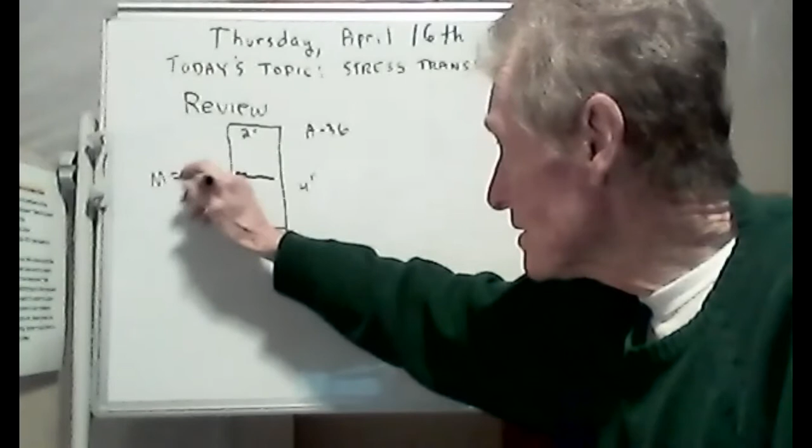And let's suppose you had a bending moment. Now, I like to draw my bending moments with double arrows. Say the bending moment was 10 kip feet. And also, let's say we had some shear acting on it. Suppose there was a shear force, maybe, I don't know, how about 40 kips?

Now it's a beam. You understand now, this thing's going back in space here, and you're looking at the cross section of a 2x4 inch beam, only it's steel.

Now, we're having a little review here while people log on. Oh, I got some more customers. Look, Caitlin, Daniel, Gavin, Eric, welcome.

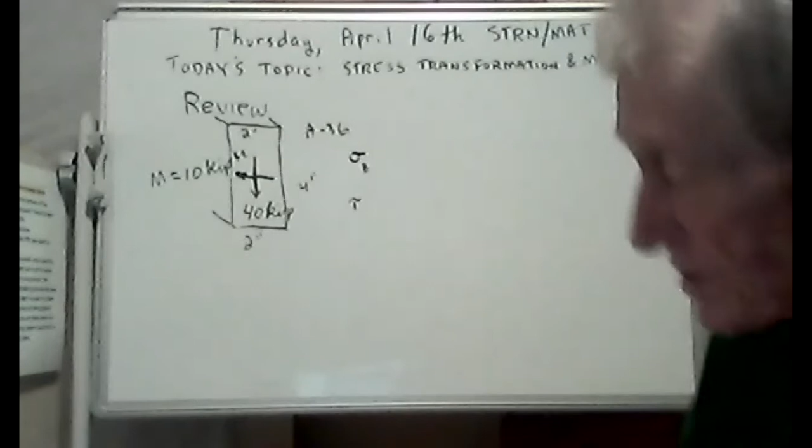Okay. Now, what I want you to do here for a review is to find the bending stress and the shear stress, but the question is where. See, you gotta tell us where, because remember at the top and at the bottom there is no shear stress.

The maximum shear stress on a beam that's bending is in the middle. The maximum shear stress is in the middle. Maximum shear stress. Remember that.

I don't know if I took you on that little field trip to the atrium there around the corner from our classroom. There's a beam that's split in the middle because of the shear stress. I don't remember whether I did that with you or not.

And now the normal stress, it's just the opposite. It's maximum at the top and bottom, and it's 0 in the middle. Here, I'll write that for you visually oriented people. It's 0 in the middle. We probably should say, what's the word instead of middle?

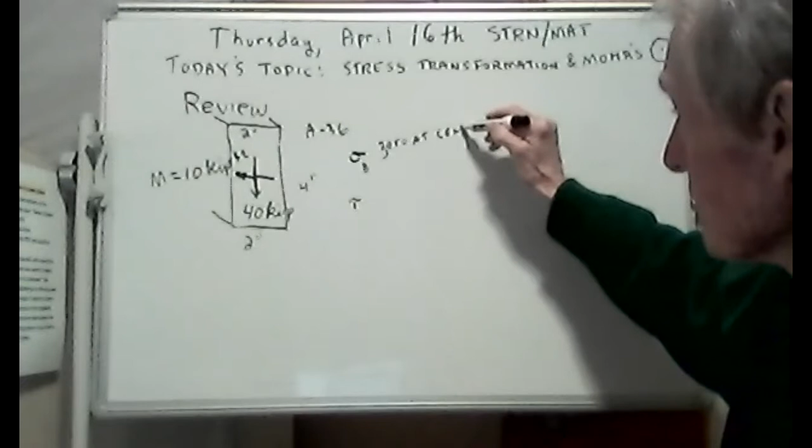Centroid. Yeah, because not everything's a rectangle. It's 0 at the centroid. And it's maximum at the top and the bottom. Well, it'll be maximum at the maximum distance from the centroid. Top and bottom are the same distance from the centroid.

Now the shear stress is 0 at the top and bottom. Hopefully I'm boring you and you know all this. It's 0 at the top and the bottom.

But see, it's maximum at the centroid. The normal stress is maximum at the top and the bottom. I just spelled bottom wrong. That's not right. There you go. And the shear stress is maximum at the centroid. They're just kind of opposite.

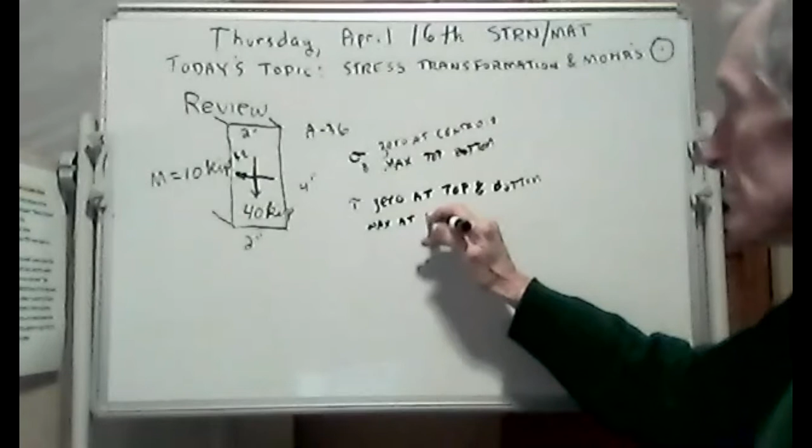And y'all, little Southern talk, y'all understand that. I'm just repeating stuff that you already knew. Can you read my writing there? It's awful small. Well, I hope you can read it.

If not, speak up. Let's see, we got Eric, Daniel, Dalton, Caitlin, Cameron, Allison, and Kristen's back with us. Hey, Kristen, have you had your coffee this morning? I'm working on it, sir.

Okay, now you have to decide where you want to talk about. Well, I'm going to pick us a spot and we're going to do it. We're doing a little review here for a minute, and then we'll get into our main topic, which is stress transformation. But let's pick this spot right here.

Now, if this is 4 inches, that distance from there to there is 1 inch. You're 1 inch from the centroid, and you're also 1 inch from the top. And we want to find the normal stress at that location. We could give it a name. How about calling it point P? We're going to find the normal stress at point P.

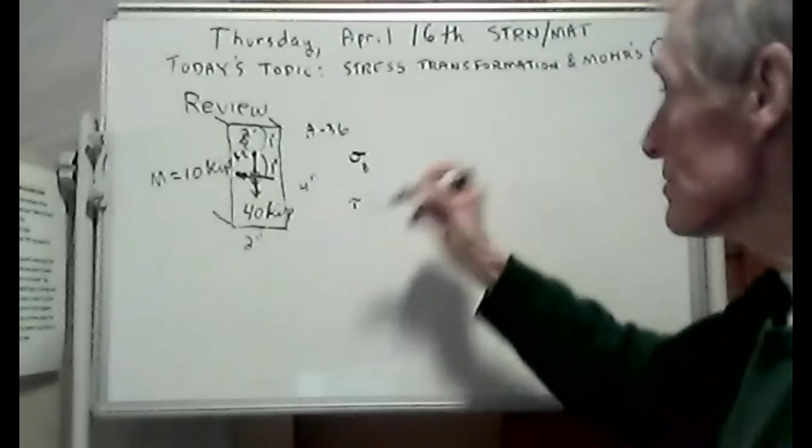Okay. Well, you know the equations. Here, let me write the equations. You know this one here, it goes minus My over I. And this one goes VQ over IT.

Now these equations have names, and you know these equations by heart. You know that this one here is called the... starts with F. Flexure formula. Yay, it's the flexure formula. And this one here is called the shear formula.

All right. Well, notice I is in both of them, so we're going to have to get I. Well, that's not a problem. That's just 1/12 times 2 inches, times 4 inches cubed. Man, that's it. Okay, I could almost do that in my head, but no, that's too hard. I can't do that in my head.

Okay, I got an answer. I'm getting 10 point, a bunch of sixes, inches to the fourth. Hey, looky here, we just figured that out. And the bending moment is given.

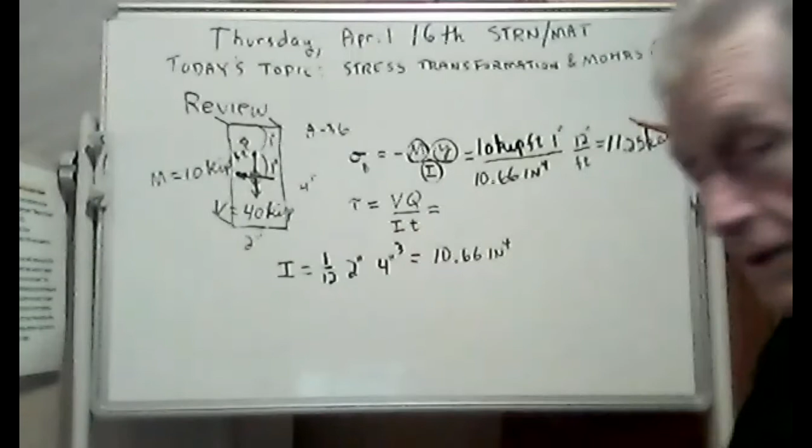Okay, now we're going to do this one. Now we know V, this is V right here. See, V is 40 kips. Q, oh, here's that Q thing that gives students trouble. It's called the first moment of area.

I we've got. V we've got, V is 40 kips. I is sitting right here. Now T is 2 inches. So I know that, oh, it's that stinking Q that could give you problems.

Again, I think I'll shut up for a minute and a half and I want to see if you can do that. We're trying to find the shear stress at this location P. I called it P, it's right here. It's kind of 1 inch from here, that's where it's at. We want to find the shear stress. See if you can do it. On your mark, get set, go.

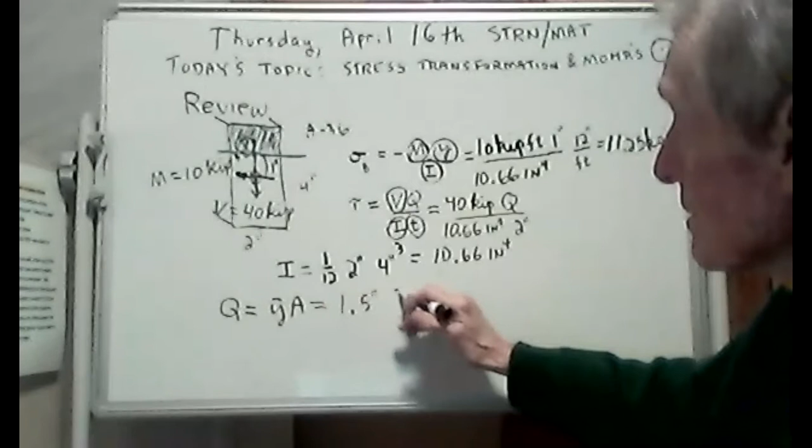There you go. Now, the way I tried to tell you to find this Q thing is you draw a line through the place where you want to find the shear stress, and then you color everything above the line. There, I colored everything above the line. And for rectangles like this, Q is just going to be Y bar times A. It's just going to be the distance to the centroid of your colored area, which in this case is 1.5 inches. And the area is a 2 inches by 1 inch area. And I'm getting 3 inches cubed for my value of Q.

Now we know what Q is, it's 3 inches cubed, and you can solve it. And I'm going to do that now, and I'm going to get the shear stress at that location.

Well, I got an answer, and what I got was 5.63 KSI.

And I'm going to wait till I hear some uh-huhs. Uh-huh, there's one. Yes, Professor. There's 2 of them, I need one more.

Hey, what about my friend Kristen? Kristen, did you get your coffee, and can you give me an uh-huh? Yes, sir, on both. Yay, great.

Okay, that was a fun little review thing. What I'm going to draw now is called a stress element. I've told you about these before, but we're going to draw one. I need a little room here. We'll say goodbye to all this stuff. That was fun, wasn't it? I need a little room right in here. Now we're going to draw a little stress element right in here.

It kind of looks like a little sugar cube. Here, I'll zoom in on it. See, this is just an enlargement of this little, what they call a stress element. You'll see them all over your book. I know you guys have been reading your book. It's called, that's not how you spell stress. It's called a stress element.

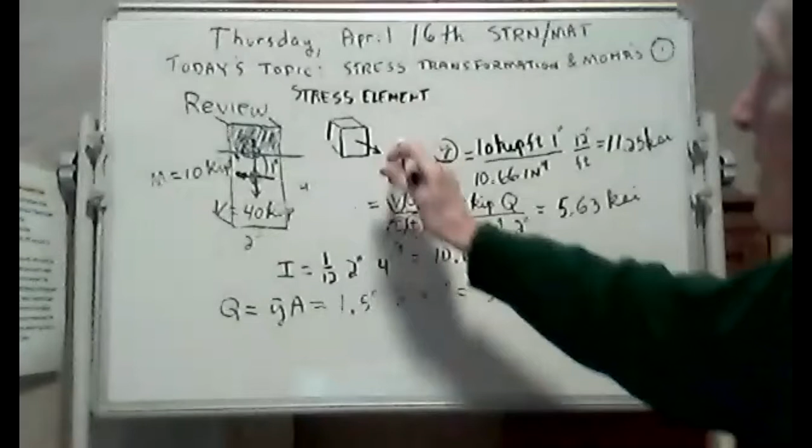And I tell you what we've discovered. We've discovered there's a normal stress. It's a tensile normal stress, because this thing is on the upper half of your beam. Remember at the top, no, I'm wrong, it's compressive normal stress. And this answer here should be negative. Do you remember the equation, had I erased it, doggone it. But the equation had a minus My over I, didn't it? And see, when y is positive, the answer comes out negative. And so you have a compressive stress

on that stress element. Now the normal stress, and I'll tell you how big it is. It's 11.25 KSI. Now you also have a shear stress, and it's going down like this. That's the shear stress. And how big is it? Well, it's 5.63 KSI.

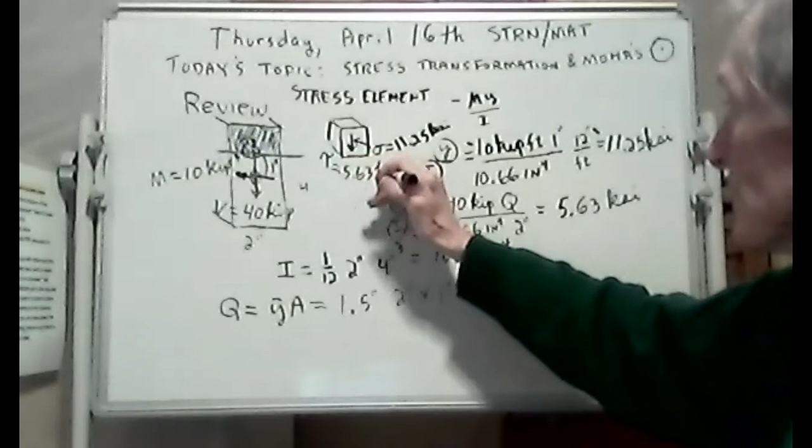That's a stress element kind of enlarged at this point P in your beam, and it's got both. It's got normal stress, which happens to be compressive, and shear stress.

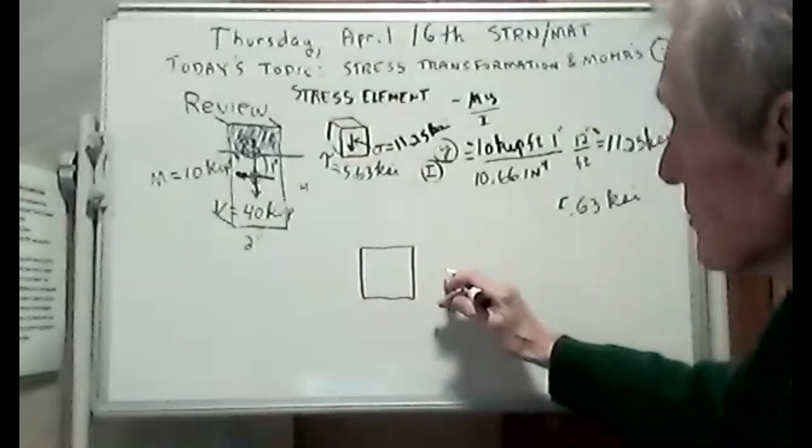Okay, great. Let me make a little room here. I want to draw this stress element like this. You see this normal stress? It's going like that. What I'm doing is kind of turning this around, and the shear stress, that's the normal stress, and the shear stress is going - I'm kind of looking at it from over here. It's kind of hard to explain, but an observer over here looking at this thing will see the shear stress going down on that side and the normal stress.

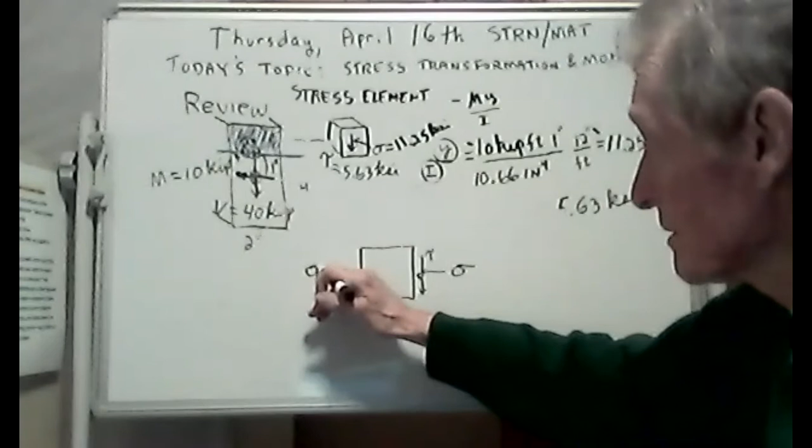Hey, look, the sum of the forces on any body in this class has got to be 0. And so there has to be a compressive normal stress acting on this back side. It's kind of hard to draw back there, but it would be going that way.

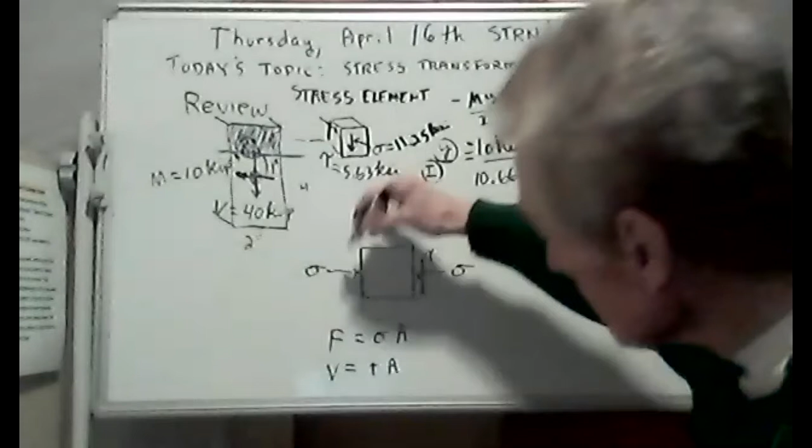Now on this shear stress, it's going down. See, force is equal to stress times area. Or if you're doing a shear force, it's shear stress times area. And guys, you can't just have one force on this thing. If you got a force going down, you got to have a force going up. So there'll be a shear stress acting on this backside. Kind of hard for me to draw. I don't know, we can do it in dashed lines, maybe going up on that backside.

But now we got a problem. Do you see how this thing would start to spin? Nothing spins in this class. So you have to have a shear stress going that way. Well, now you got another problem. You'll have a force going that way if the shear stress is going that way. So you got to have, there you go. There's your stress element. You got two compressive stresses here. Nothing's going on this way. You don't have any stress pulling or pushing that way, do you? But you do have shear stresses, 4 of them. You have to have 4 of them for equilibrium.

So we've talked about reviewing the flexure and shear formulas. We've talked about stress elements. Now I want to do another review thing. I want to go back to something we studied a while back, unless there's a comment or question.

If you have a question or comment, I'm listening. Is my microphone working okay? Yeah, it's working fine. Wonderful. Well, okay, I don't hear any questions or comments. You seem to understand that.

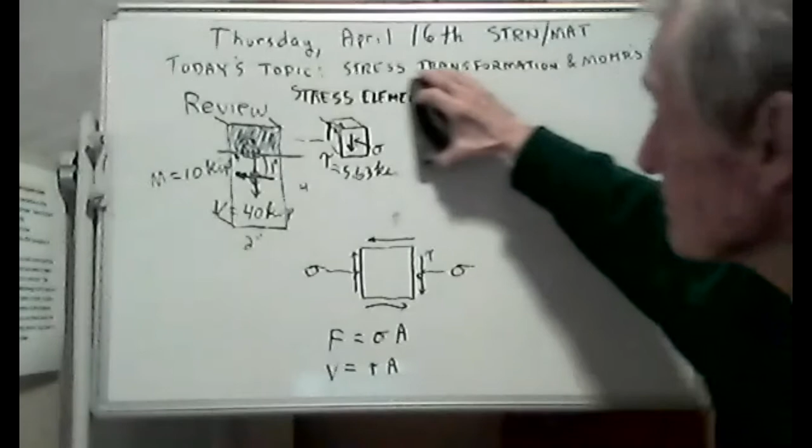I'm going to erase all this and do another minute of review, and then we'll launch into some new stuff here in a little bit. We're still doing a little tiny bit of review here.

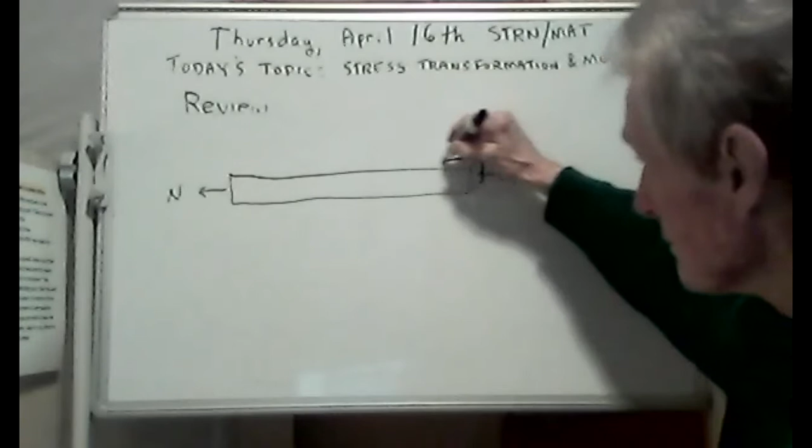Trying to draw that force there, it'd be acting in the middle. Kind of messy there. All right, and then this would be... oh gee, you get the picture. It's a little wavy there, but it's a square rod under tension.

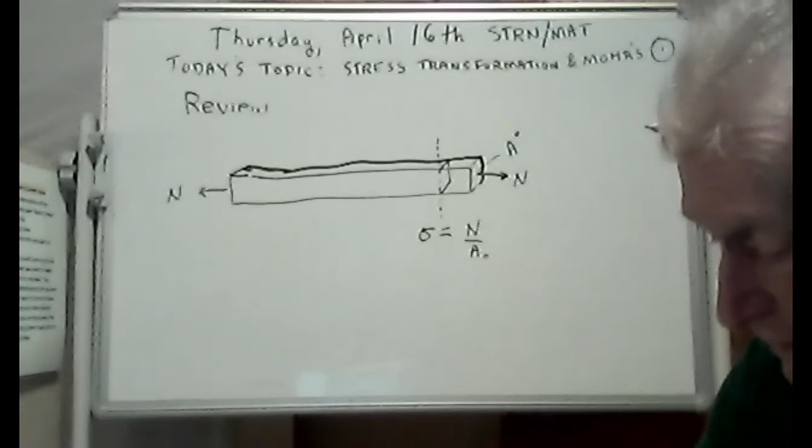We're going to call this area here A0. So if you sectioned it perpendicularly like this, and you took a section there, you would have that same tension throughout the piece, and your normal stress at any location in here, if you cut it perpendicularly, is just your force divided by your area. That's pretty boring, we know that. But back in February, or whenever it was, long ago, we talked about what happens

if you cut it at an angle. See, like if you cut this at a 60-degree angle, which would be about kind of like that. It's kind of hard for me to draw that, but I'll try. See, if you sliced it like that, you're going to discover that you're going to have a normal stress going this way, but you're also going to have a shear stress going that way.

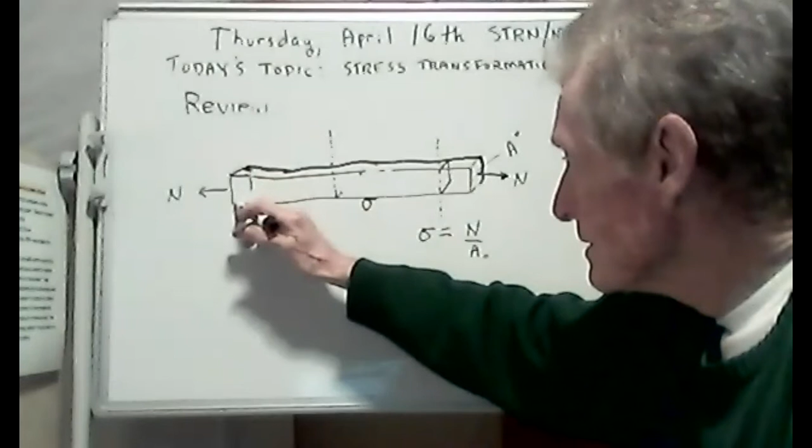I didn't draw that very good. If that's 60 degrees, let me try drawing it again. There's some hidden lines in here, we're gonna put these hidden lines in here. There we go. And so if you cut that at 60 degrees... oh gee, trying to cut it at 60 degrees, it'd be like that. All right, I'm not that swift with the artwork, but that's not too bad, I think you can almost see that.

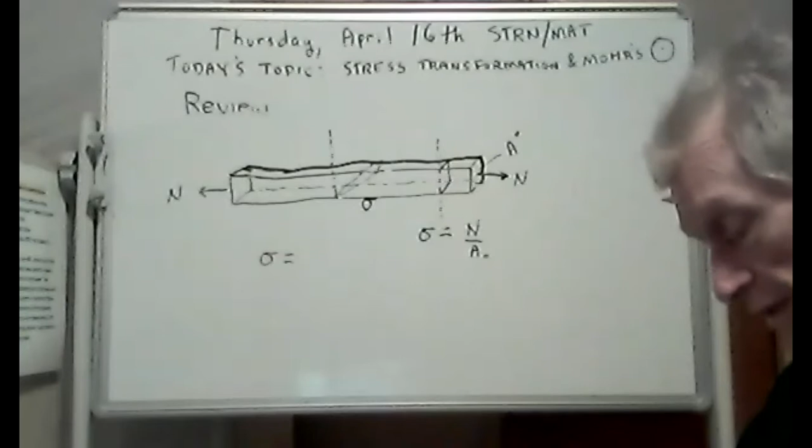If you cut that at 60 degrees, it's got a bigger area, and so you can't divide by this area here. I think we derived this, I'm not going to go back and derive it again, but we came up with these lovely equations. This one goes like this. Hopefully you have this in your notes from long ago, where this is the angle theta here, and the shear stress is equal to this here. We derived those equations long ago. The moral of the story is you have normal stress and shear stress at different orientations inside your piece.

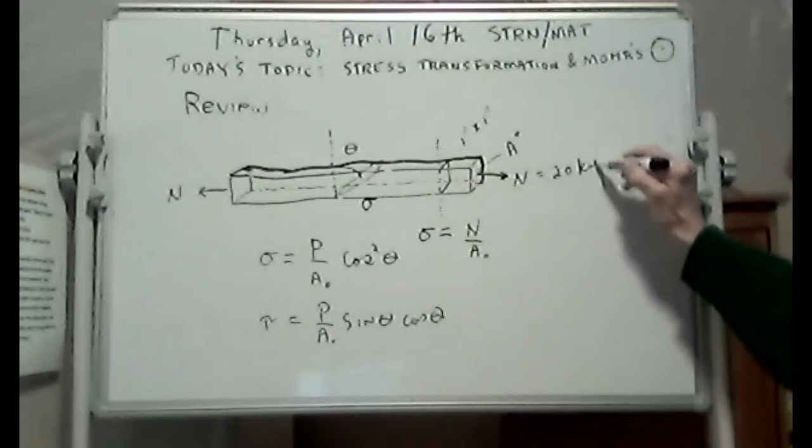Let's put some numbers on it. Suppose this is a 1 inch by 1 inch square steel rod, and this normal force, we'll make up something, we'll say it's 20 kips. Well, the stress right here, if you're interested in the stress right here, that would be 20 kips divided by 1 inch times 1 inch. I get 20 ksi.

I hear a sound, it's sort of like somebody slurping up some vanilla pudding, but maybe that's not what it is.

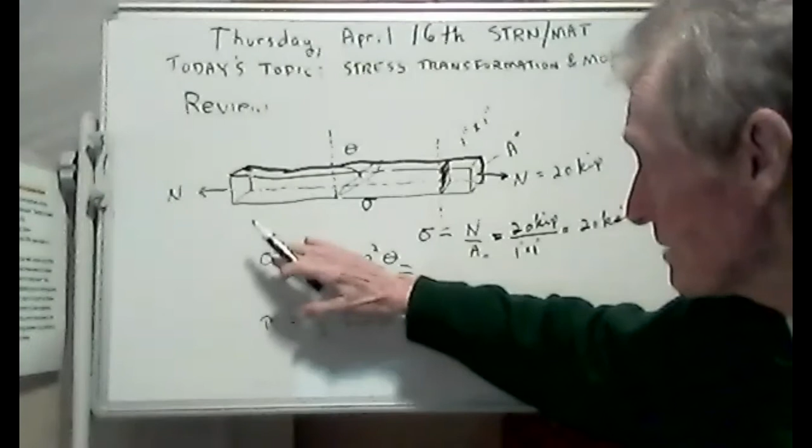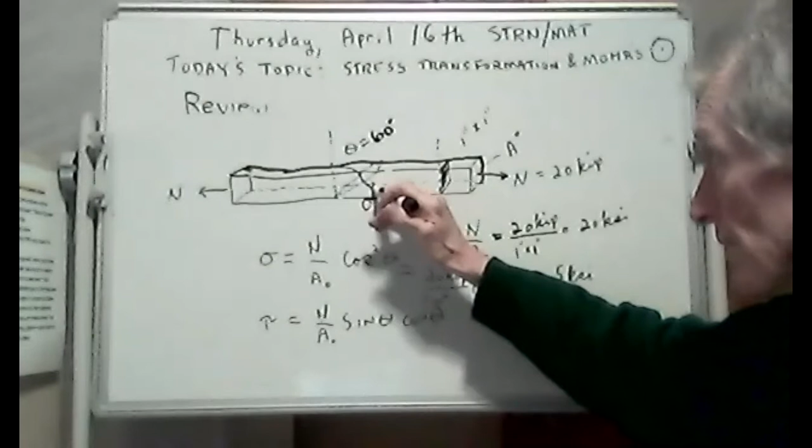Okay, now what if you slice this at an angle here? Well, let's do that. Oh no, wait a minute, you're supposed to use N for the normal force, like the book does. Okay, well then this would be... divided by, well, that's just 1 square inch. Ah, but you have to go cosine squared of 60, don't you? What is the cosine of 60? Is it a half? 0.5, I think it is. And when you square it, a half squared is a fourth, isn't it? You know what I'm getting? I'm getting 5 ksi. You guys can plug that in your calculators if you want to. We do have a normal force at that orientation, if I slice it at 60 degrees. And you do have a normal force, it would be going perpendicular to your area, kind of like that. That's what normal means, it means perpendicular. But now you also have a shear force.

Let's see what that is. That's going to be 20 kips divided by 1 square inch, sine of 60, sine of 60. I don't know what that is. I thought it was sine cosine, not sine sine. You're absolutely right, but I wrote it right.

I said the wrong thing with my voice, didn't I? No, later on in that. You wrote it wrong as well. It says sine, wrote it sine wrong. I did not write it wrong. Move your hand to the right, keep going, where you wrote it out there. Does that not say sine sine? Thank you, point goes right there. I am wrong, and I'm so proud of you. I did write it wrong, but I got you.

You're my backup. Okay, now we're going to calculate this shear stress in there. Here goes: 20 times the sine of 60 times the cosine of 60.

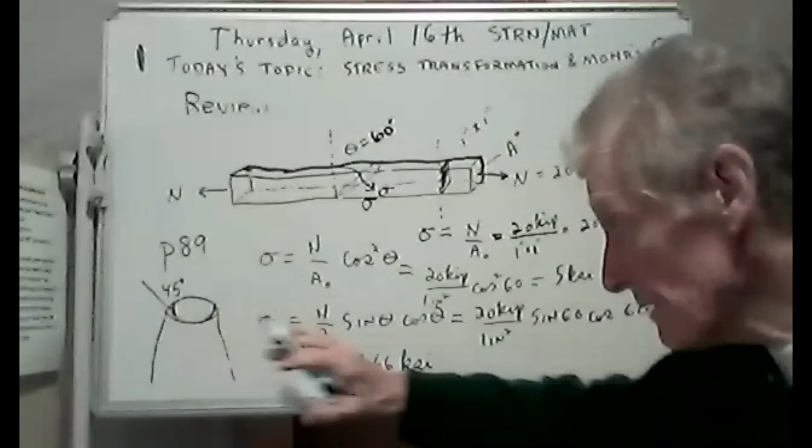It turns out the shear stress is maximum when these angles are 45 degrees. Any other angle, you'll get smaller shear stress. So naturally, it's going to break. If it's weak in shear stress, it's going to break with a 45-degree angle.

Steel and other ductile materials - steel is ductile, it's not brittle, it's ductile. And ductile materials are weak in shear stress. And if you put them under tension, what will break them is the shear stress. Isn't that interesting? Yeah, fascinating stuff.

Now, we could spend a lot of time finding the maximum of this equation at different angles. That's something you could do. Take the derivative of this with respect to theta, set it to 0, maximize it, and you'll find that shear stress is maximum when theta is 45, and ductile materials like steel will break at the 45-degree angle.

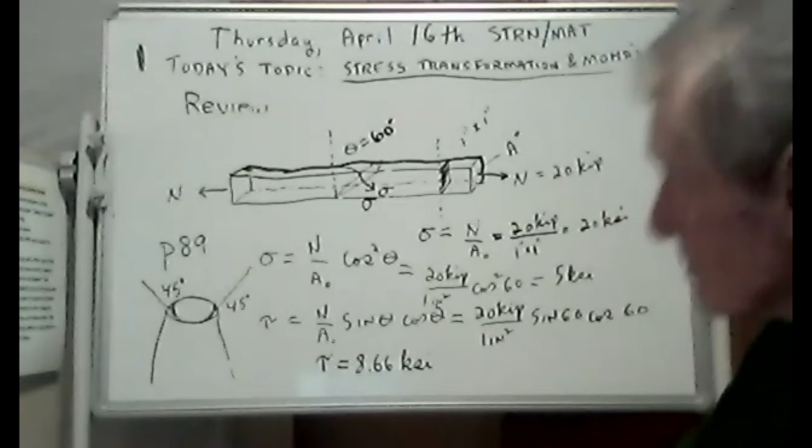Okay, I think it's pretty much time to get into the stress transformation equation, but I hope we've learned that inside a piece, you've got somebody still slurping that vanilla pudding. I can hear them slurp. I wonder what that noise is. Now they're gargling. Brandon.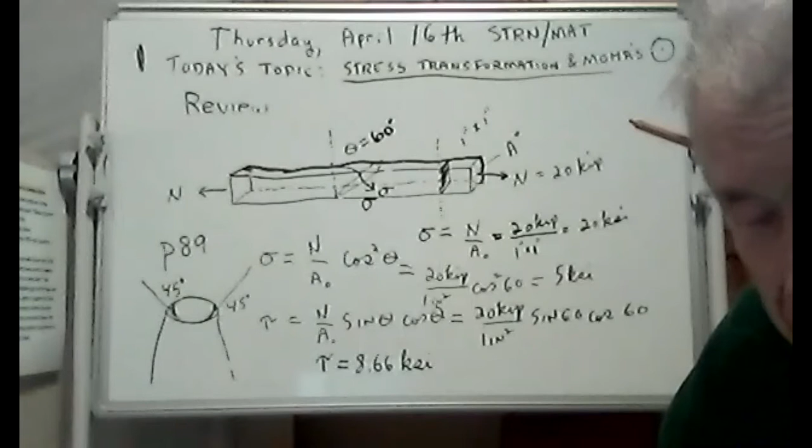Okay, inside a piece, you have normal and shear stresses going on inside the piece. We could have picked a different angle - 10 degrees, 20 degrees, 30 degrees - and there's normal and shear stresses at all those angles inside your piece. Somebody was trying to say something, but nothing came through to me.

All right, well, we're gonna tackle stress transformation now. We did a little review of ancient history here, unless you have a comment or question. All right, well, here goes. Let's get rid of that. We had a little review there, it was fun. We have a thank you point, and we appreciate the help.

Now, this stuff here is called stress transformation. It's on page 450 in your book, page 450, 451. And what they've got there is a view of a stress element. There it is - we've just talked about stress elements.

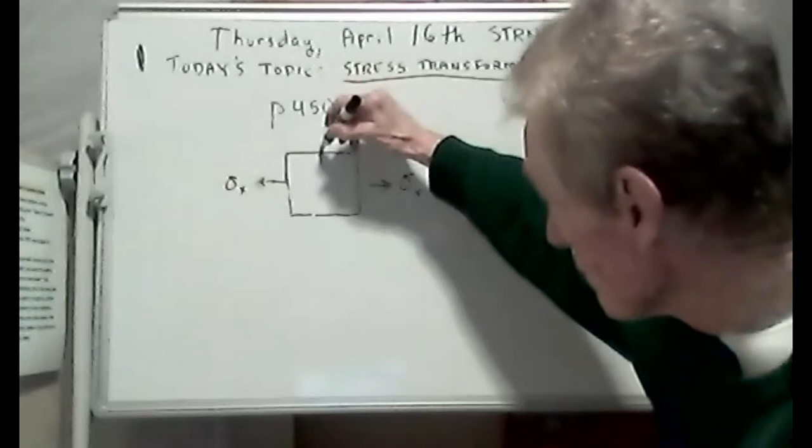And they've given these symbols. They call this the normal stress in the X direction. Of course, you'd have to have an equal and opposite in this direction. It's possible you could have a normal stress in the Y direction, and you'd have to have one down here, equal and opposite, for equilibrium. And then they put some shear stress acting on your stress element - we'll call that tau xy, it's in the xy plane. And here you would have tau xy, shear stress.

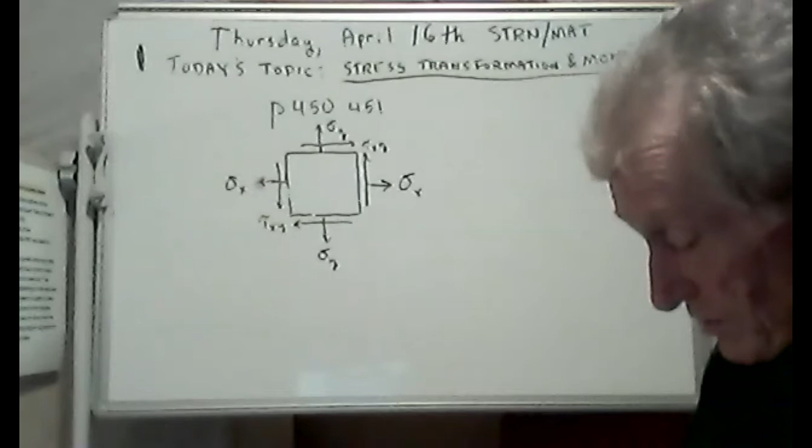Now, what they're talking about now is, what if you looked at a different orientation? What if you rotated this thing? I'll try to rotate it some angle here.

You see what I did was I rotated it some angle theta. What I'm looking at now is, what would a stress element look like that had been rotated through some angle theta there?

Well, you're going to have normal stress, only they gave it a different name. They call it sigma x prime. In your book, those of you that have books, do you see a sigma x prime anyplace? I do. Yeah, there's a sigma x prime.

And then, of course, there would be one going this way too. And then you have a tau x prime y prime. Of course, there'd be some down here too. It's getting kind of messy.

Do you see a tau x prime y prime? I see one on page 451. On page 451, I see a tau x prime y prime. I'll give you time to look.

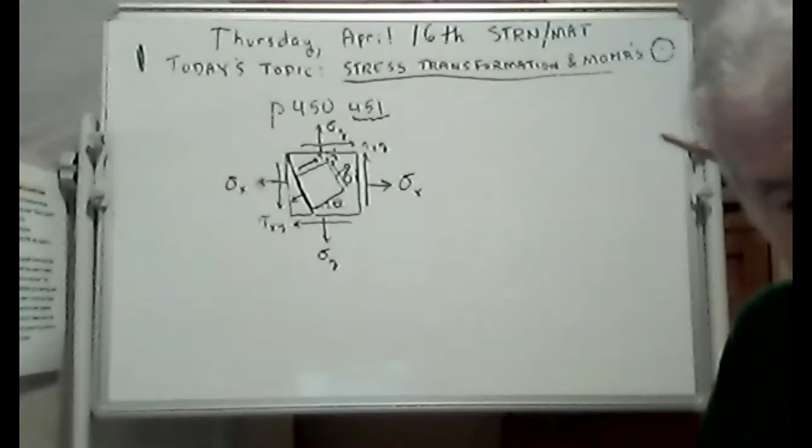They took a slice here. They took a slice. And they looked at just that slice here. Let me color it. I'm coloring this blue. My daughter gave me a blue pencil.

And what they did was just forget everything else. And they did the sum of the forces is 0 on that blue slice. The sum of the forces in the X and Y, but more importantly, the sum of the forces in the X prime and Y prime.

See, Y prime would be going like this. X is going this way, but X prime is going that way. Y is going straight up, but Y prime is going that way. See, they got those. And here's what they got.

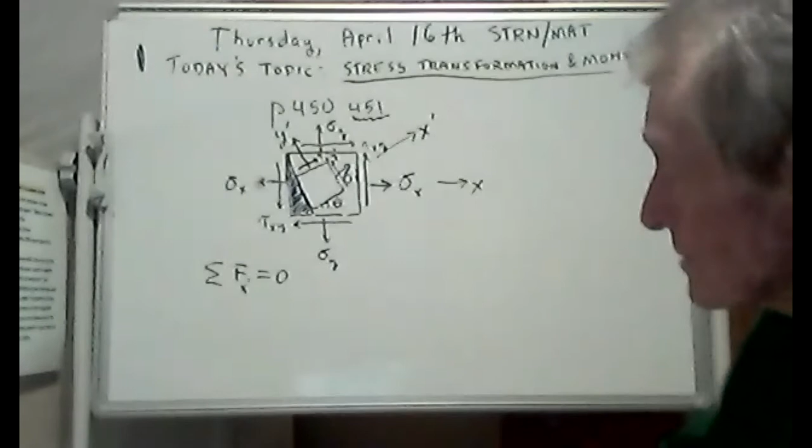I'm going to spare you the agony of the derivation. It's right there, though, 451. It's clever. See, what they did for these forces is they said you take the normal force times the area, that gives you a force. This shear force times the area, that gives you a force. And they got the sum of all the forces acting on that blue kind of a wedge.

And here's the stress. I'm going to erase this because I need the room. But you can read about it. And here's our equations. A little bit ugly, but not that bad. It doesn't scare us too bad. This is going to give us the normal stress in an X prime direction for any angle.

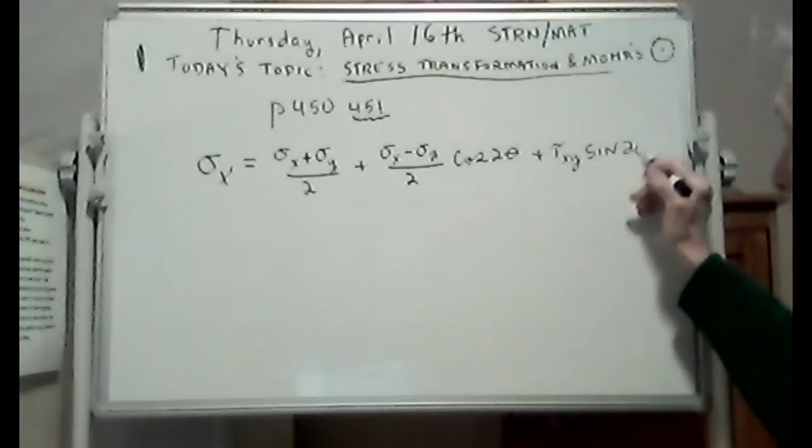That's enough. There's also one for the shear stress, but I'm going to spare us right now. We'll come back to there's another one that has the shear stress in the X prime, Y prime plane, but we're just going to look at this and we're going to do an example here.

And I'm going to do something I've never done before with you guys, and I'm a little bit scared here, but my daughter told me how to do this. She's at work, but she wrote it out for me. She says, go to the bottom of the screen and push share screen. Okay, I'm going to do what she said. I'm going to push share screen.

There, I did that. And then go to the file. Oh, gee. Go to the file. What do you mean, go to the file? Oh, man, I'm supposed to go to a file. Maybe it's this. I bet it's in this documents. Yeah. Hey, that's it. Double click, maybe? By Jove, there it is.

There's the file. Now, what I want is Google Drive. What do you mean, Google Drive? I don't see anything that says Google Drive. That's what she said. I'm just reading her instructions. She said, I think I did what she said.

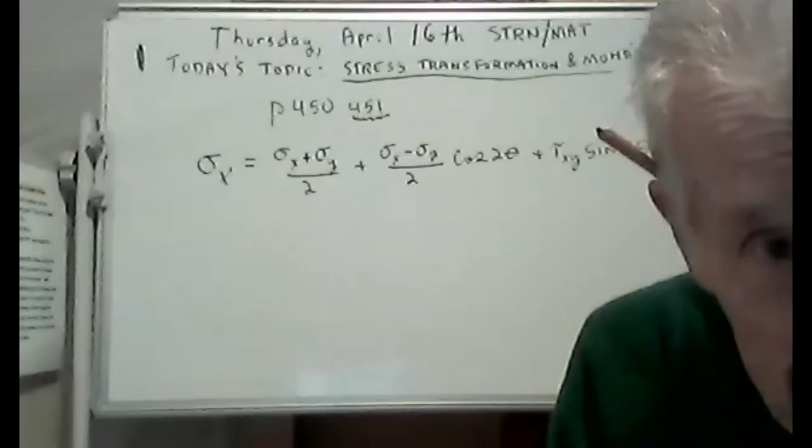Okay, do that then. Oh no, I've clicked on stop sharing. Now I'm back to this. Okay, so hit start sharing again, or share screen again. Okay, I'm going to push share screen, and then click on the Mohr's circle document if it pops up. Okay, and there it is. Double click or single click? Don't know, double click. There it goes. And when I do that, it pops up, and there it is.

But my daughter said it says click on Share to Everyone tab. A pop-up will come up at the bottom. I don't see any stinking pop-up coming up at the bottom. Oh, I'll have to talk to her about it.

Okay, well guys, here I'm just going to have to... you will have this. Maybe that's it. Okay, you will have this. Okay, well, all right, I'm sorry. I failed. What I need is something that says Share to Everyone tab, and I never saw it.

There is some stuff down here. There's a thing on files. And I don't know what the rest of this stuff does. Okay, well, let me bail out of this, and we'll do it the old-fashioned way. And now you're back with me, right? And you can see me and hear me, can't you? Yeah. Yes, Professor. Good, excellent.

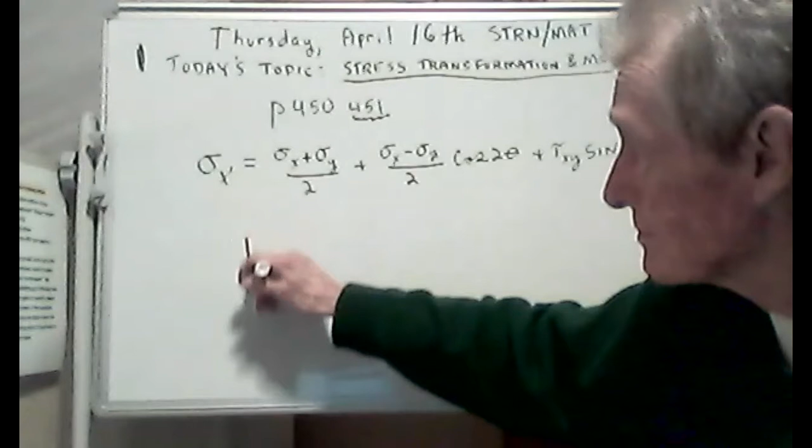Well, I've got this thing that I tried to show you. And what I've got here is a stress element. You do have these on Blackboard, on content. I sent these to you, and I hope that you got them because it's your homework. I gave you a homework assignment. I've got 6 of these, and this is the first one. And see, we can do this together.

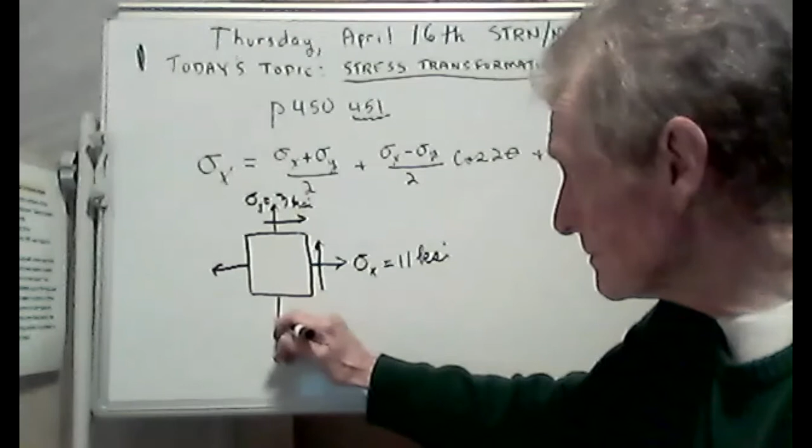Okay, we got our stress element, and we have our shear stress. This is number one. There's 6 of them, and it's going to be your homework. And I'm trying to explain what I want you to do with it.

But see, in this case here, this is 11, and this is 3. 11 and 3 make 14, so that's really a 7. Here, let me write this out for you. Your stress at some other angle is going to equal 7 plus — this is 11 minus 3, which is 8, divided by 2 is 4. And this is 3. Well, there's your normal stress at any angle you want.

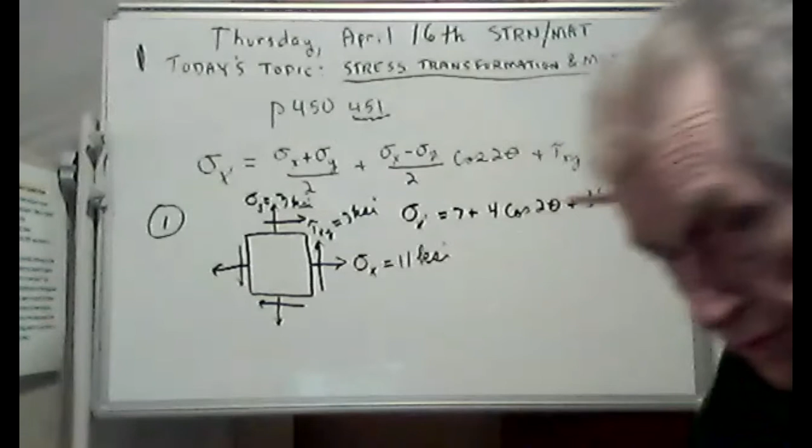Now really what we're interested in this class is the maximum stress, because that's where it's going to give you a problem. The maximum stress is where the piece is going to fail. So we're interested in the maximum stress. So what angle would that be? Well, I don't know. That's what Mohr's circle will tell us.

Now we could make a table of values. Why don't we do that? That'd be fun. We'll make a table of theta versus your normal stress at a different angle, and we'll do this together. Let's go 10, 20 degrees, 30 degrees, 40 degrees, 50 degrees. Now you could go 0 degrees. Here, first of all, let's do 0 degrees.

0 degrees. We're going to plot theta versus the stress at a different angle. Okay, well, when you plug in 0, what's the sine of 2 times 0? Anybody know? That'd be 0, wouldn't it? And this would be, well, what's the cosine of 0? Well, it's just 1, that's 1. So what you got here is 7 plus 4. Well, that makes 11. Well, you see, that's what you get.

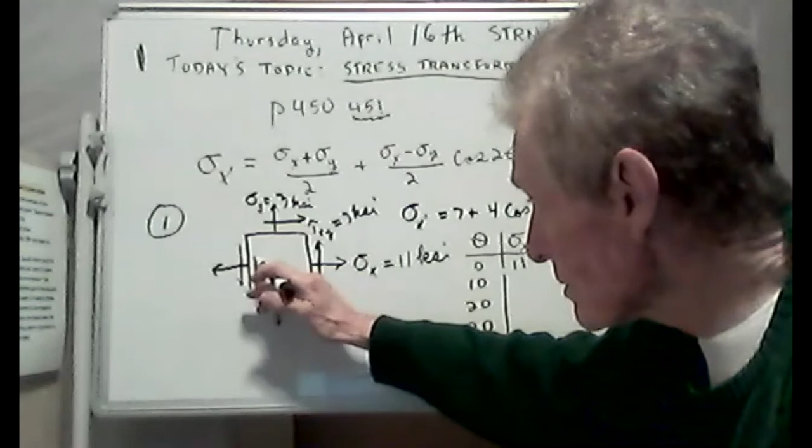Because when your theta is 0, we're talking about that. Now, 10 degrees is when you tilt this just a little, just a teeny tiny bit. We're going to tilt it 10 degrees. It's kind of hard for me to draw 10 degrees, but you got the message. Now we're going to plug in 10 degrees. I want you to plug in 10 degrees, and I'm going to plug in 10 degrees, and here we go. I'm doing it now.

Did you get 11.78? These are KSI. Ooh, isn't that interesting? It's bigger. If you're looking at another orientation there of 10 degrees, it's bigger, isn't it? The stress is bigger, the normal stress is bigger. How interesting. Okay, let's go with 20 degrees.

Plug in 20 degrees in this equation. Here we go, I'm doing it now. Well, I got an answer of 11.99 KSI, but I want to wait till I hear a couple of uh-huhs. That's what I got. Yes, sir. Yeah, well, go ahead and finish this. I'll have a sip of water while you guys finish this. Go ahead, on your mark, get set, go.

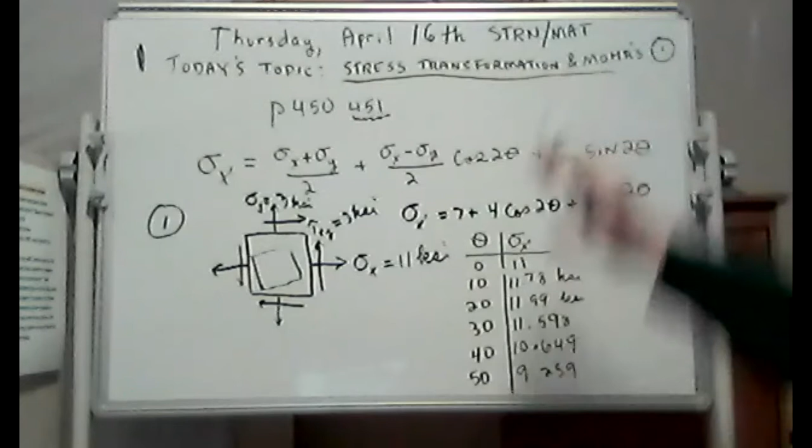I need to show you that, but I need to erase something to make some room here. That was a lot of fun, wasn't it? Okay, well, I'm going to do the Mohr's circle now. I'd love to show you how the heck they came up with this Mohr's circle.

By the way, they show you how to do a Mohr's circle. Let me show you the page it's on. It's on page 471. On page 471, they give you a step-by-step, foolproof plan to draw the Mohr's circle to find out where the maximum stresses are in a piece. And that's what we want to know, where the maximum stresses are.

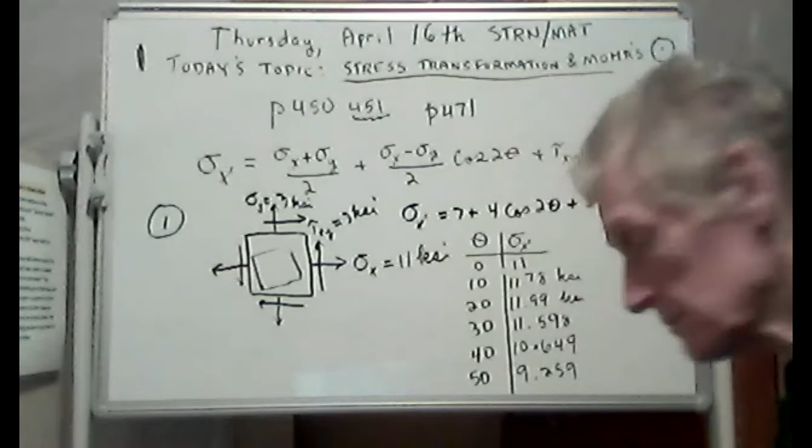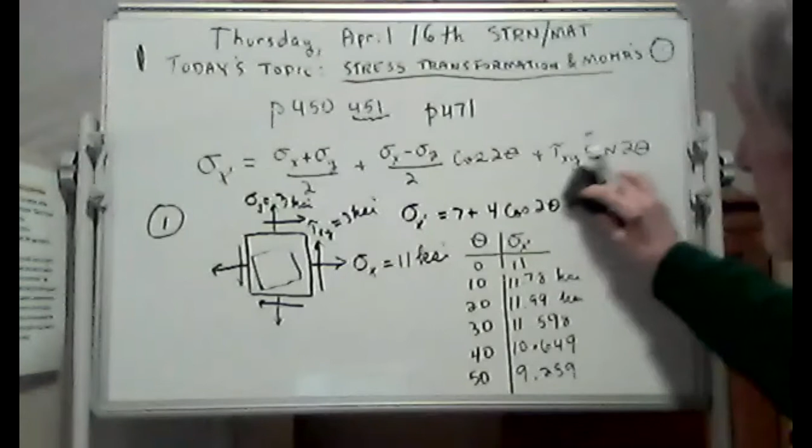Can't find my eraser. Yeah, here it is. Okay, well, let me put that information over here in the corner. Well, no, I've got it, and hopefully you're taking notes. I need some room to do the Mohr's circle. Here goes. Say all that goodbye.

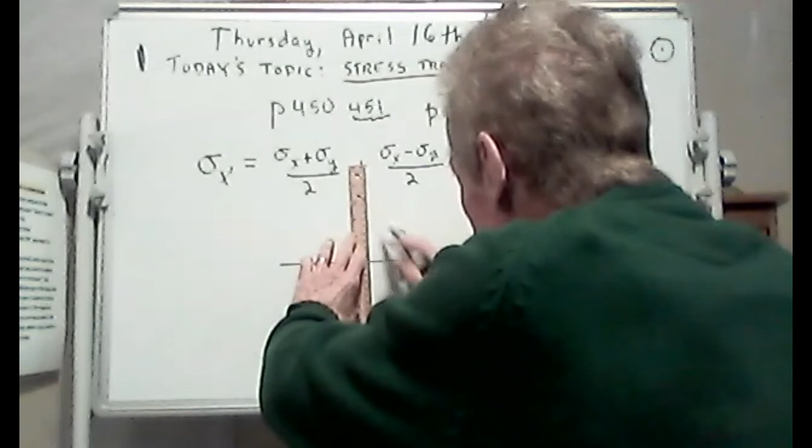Okay, now here's what you do. You make a normal force axis. This is going to be a normal stress axis. And this is going to be a shear stress axis. No, I don't mean force, normal stress axis and shear stress axis. What's weird is the shear goes this way and the normal stress goes that way.

And on page 471 it says - oh gee, I erased my picture there. I've got to have this or I can't do it. This was 11. This was 3. And this was 3.

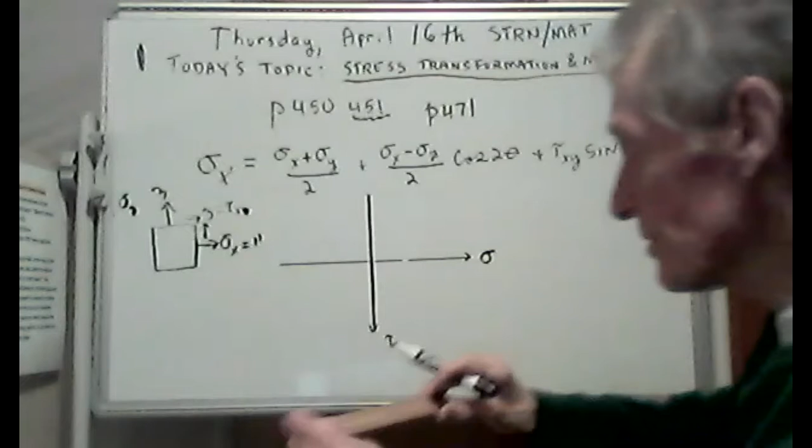See, this is sigma y. This is tau xy. Okay, so what you do with your ruler is you come over here to 11. This is the first thing you do, and you make a mark. There it is right there. I'm using centimeters, you can use anything you want, just make sure it's always the same. And I made a mark at 11.

Now this is 3, so I've got to make a mark at 3. Okay, hang on a minute. 1, 2, 3. It's right there, that's at 3. Now the distance between these is 8, between the 3 and 11 is 8. So you put a dot right there.

That would be at 7, wouldn't it? Right smack dab in the middle. That's going to be, I think it's going to be the center - it's going to be the center of your Mohr circle. But now, going back to this 11, I skipped a step.

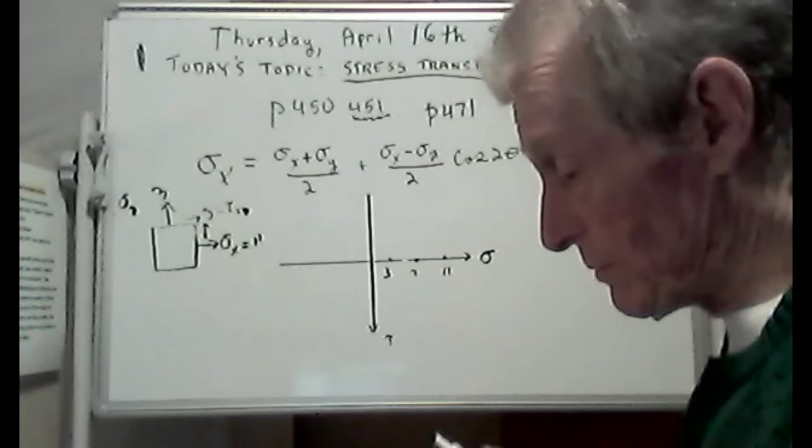You go over to 11, that's your first step, and I did that. And then you see how this goes up 3? When they derived this, when Mohr came up with the circle, he goes down 3. If that goes up 3, you go down 3. So come on down 3, put a dot right there. This is your, what I call the anchor point. I'll call it point P, I call it your anchor point.

How do you spell anchor? A-N-C-H-O-R? Is that how you spell anchor, do you think? It looks good, that's your anchor point.

Now where this 3 is, whatever you did here, if you go down 3, don't get mixed up now. This is at 11, but we went down 3. Now if you go down 3 here, you've got to go up 3 here. So let me put 3 right here. That puts you right there. Now we're going to draw our diameter of our Mohr circle. Here it is.

That is your diameter of your Mohr circle, and that's the center. If you can remember this much, you go over 11 and down 3. That'll get you started. Now we're going to draw the Mohr circle. Here goes.

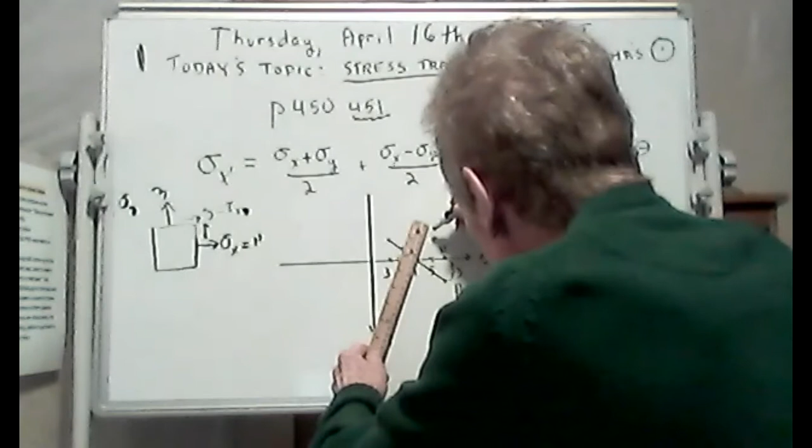This is 4 right here, and that's 4, that makes this 5 - it's a 3, 4, 5. So I'm just going to put a bunch of 5s in here so I can make a nice circle. There's 5 right there, and there's 5 right there. From the center, the radius is 5. That puts you right about there.

That's pretty good. Okay, now I'm going to draw my circle. Here goes. We are drawing the Mohr's circle. Ta-da, hey, there it is. Pretty good. That's your Mohr's circle for this stress element.

Now, I didn't put the other values in here, but you know how they go.

Now, from this, we can tell the maximum stress. This is your stress axis. The very biggest stress that you got on here occurs right there - that's your maximum stress. And if this is 7 and this radius is 5, that means your maximum stress is 12 KSI.

Not only that, but it gives you the angle that that stress is at. Now remember, these are double angles. All angles are measured from the anchor point, and angles are measured counterclockwise as positive. And if you have a 3, 4, 5, you guys have all memorized that angle. That angle right there, it's a double angle. I'd like to derive it so you could see why they're double angles, but that double angle is equal to 36.87. You've memorized that, haven't you? I told you to.

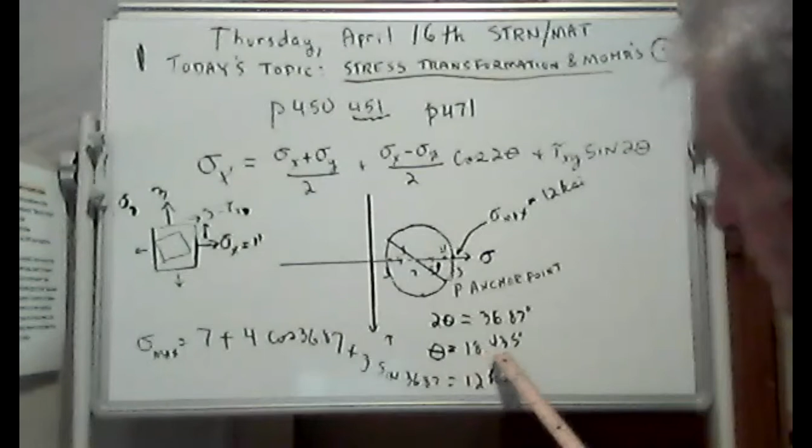Do you remember we got pretty dang close to 12 KSI on one of those? But what was the angle it was at? 20? Was it 20? Yes, sir. It was, yep, 20. Well, the actual angle that you need, if you want the maximum normal stress, is 18.435. 20 is close, but it's not - it won't give you the 12 KSI.

Now let's go ahead and show you the maximum shear stress. There's another lovely equation for shear stress. Let me write it down. Gee, no, we're running out of time. Have you ever noticed the time just zips by in this class because it's so interesting? Okay, now here we go. We're going to write the equation for shear stress. See, you can get it from your Mohr's circle. I can tell you right now what the maximum shear stress is, but here's the stress transformation equation. This happens to be on page... lost my page. Here it is.

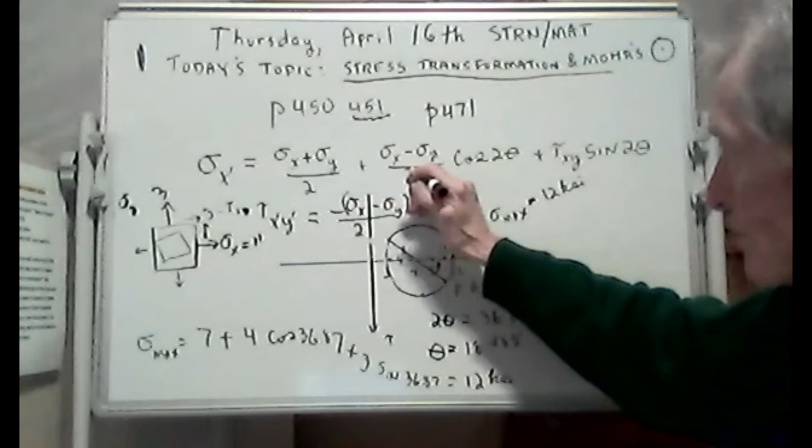It's minus sigma x minus sigma y over 2 - it's not squared, that 2 goes up there with something else - times the sine of 2 theta. I'm running out of space here, let me scoot that down a little bit. See, that's your maximum. Plus tau xy cosine of 2 theta. All right, now that is the equation that you can derive from that pie-shaped wedge, sum of the forces are equal to 0.

And in this case here, let me write the numbers for you. This is 11 minus 3, that's 8, divided by 2 is 4. So what we have here is the shear stress is minus 4 sine of 2 theta plus - oh gee, I'm running into some trouble, I might have to sacrifice a little room here, but not much - 3 cosine of 2 theta.

There you go. Okay, now let me show you where the maximum shear stress is, and then we'll see if it fits this equation. It's going to be right here. See, this is your shear stress axis going this way.

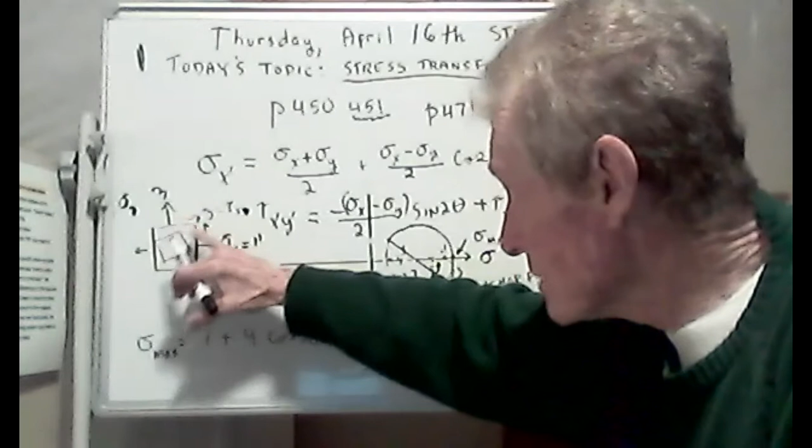It's right there, and I'll tell you what it is. That's your maximum shear stress. Remember that steel rod that broke, that fractured because of shear stress? It broke at 45 degrees. But this isn't going to be at 45 degrees because that rod only had tension, no tension or shear stress in any other direction. It's a little more complicated, but I can tell you what it is. It's just the radius of this circle. It's equal to 5 KSI. The maximum shear stress is 5 KSI.

Now let's plug it in and see if it's true. But we need the angle. Remember, all angles are measured from the anchor point. Here's your anchor point, P. Now in this angle, we got to go like that, and that angle is a double angle. It's negative 5313 - this is 3687, but going this way, it's negative 5313. So we're going to plug that in: minus 4 times the sine of negative 5313, plus 3 times the cosine of negative 5313. Let's see what we get.

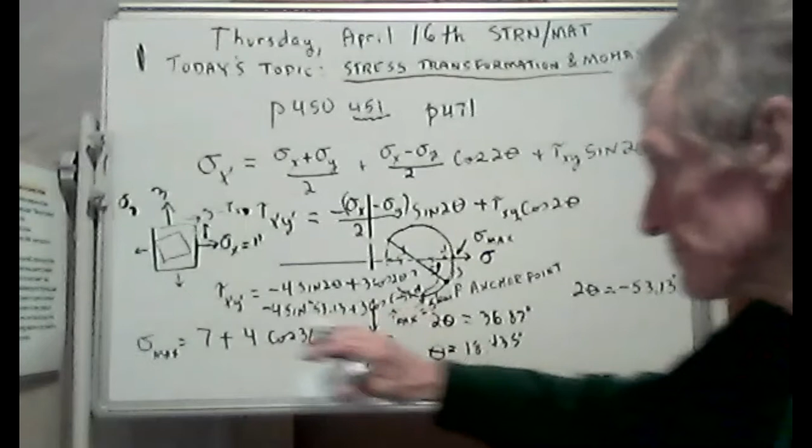Plug that in, get your calculators, plug it in. Okay, minus 4 times sine, negative 5313... it's a minus sign, okay, plus 3 times cosine 5313, negative cosine. Boy, I plugged that in, and guess what I got? I got 5 KSI.

Now, what angle is that at? Well, the 2 theta is negative 5313, so theta would be half of that. What's half of 5313? 26.565. Good going, negative 26.565. So what we're talking about is if you turn this thing this way - kind of hard for me to show, but I'll try. Maybe not that much, maybe I did too much. We're orienting it, we turned it that way 26.565 degrees, and the shear stress is maximum on that orientation, and it's 5 KSI.

Let's do another one, and then we're going to have to quit. It's fun though.

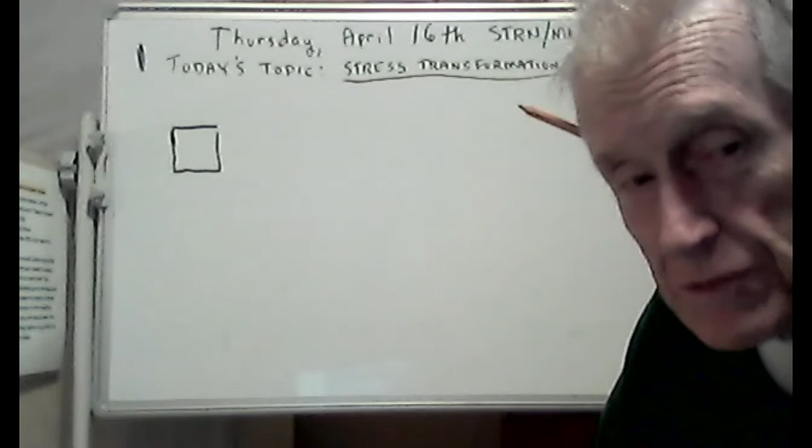Okay, now number 2. Let me draw number 2, and then we'll do the Mohr circle, and we can find the maximum stresses with Mohr circle. Now you need to know that this was done way before the age of computers. And now with computers, it's kind of made Mohr circle obsolete in that all you got to do is click in the numbers and it'll draw the Mohr circle for you. You don't have to draw it - they'll draw it for you, and give you all the maximum stresses. But here's the thing: if you never understood this, you never studied this, you'll wonder, well, that's black magic. Where the heck did all that come from? Well, I'm trying to teach you where it came from.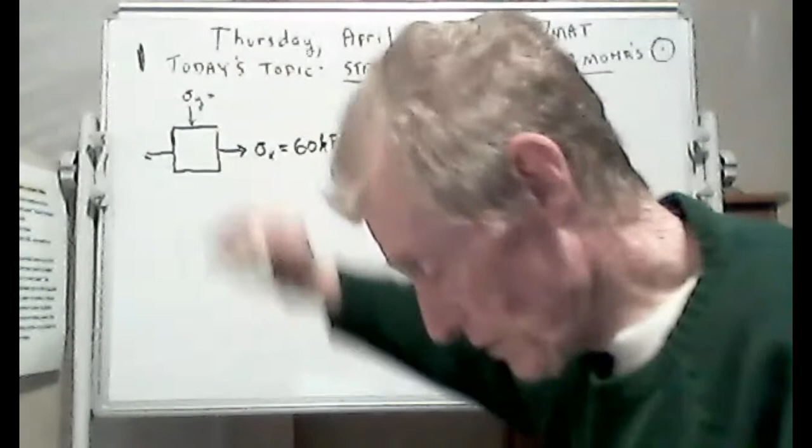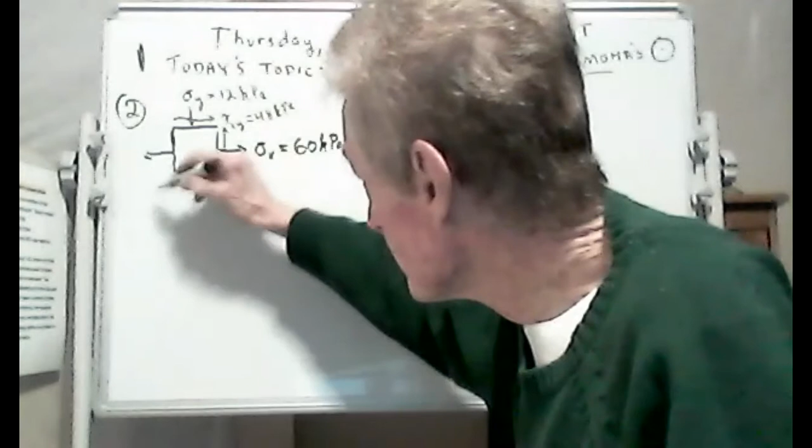Now remember where you got that stress element from. You got it directly from the shear and flexure formulas, or well, there could be other formulas. We've studied about 6 or 7 different formulas that give you stress. And you know that you can have combined loading, and that's what we've been studying all semester, how to figure the stress. Well, let's say your stress element has those values. Now we're going to do the Mohr circle.

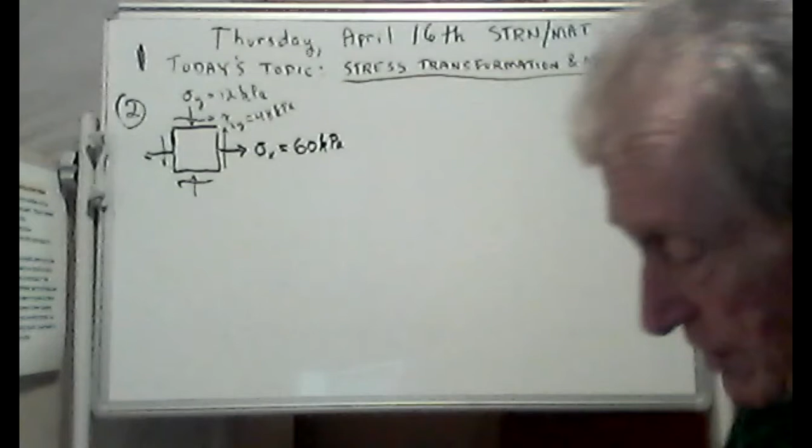So here we go, the first step - there's a step-by-step plan there. I forgot which page it is, but I told you. You make a normal stress axis - this is going to be normal stress, and here's your shear stress axis. Oops, didn't work. I don't know, something bad happened there.

Okay, now if you read that step-by-step foolproof plan that I told you about, I lost the page, but you can go back and find it.

Now the first thing you do is you put a 60 on here. Well, I can't put 6. How about, well, 6 is too little. I guess I could go 6 inches. That might work. Well, wait a minute, we got to go 48 there. Yeah, 6 will be okay.

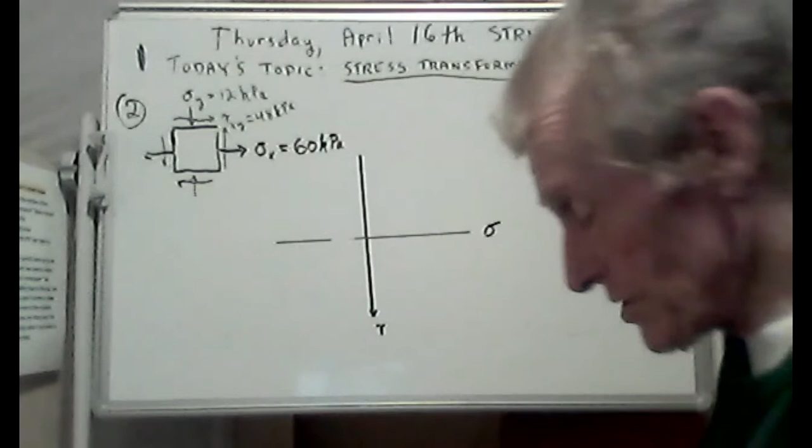We're gonna come over here 6. Right there. And then see how this is going up 48? Well, we got to go down 48. Holy cow. No, not 48, 4.8. There you go. I'm using a scale. We're going to go down 4.8. That puts you right there.

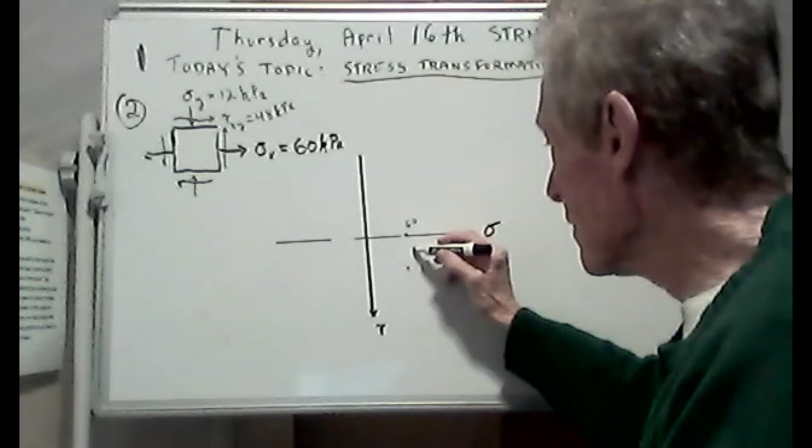But what I did was I went over 60 and I went down 48. I really went over 6 centimeters and down 4.8 centimeters. And now look at here.

This is 12, but you don't go over here to the right. See, going over here to the right, that's tension. That there is compression. So that's over here. This is negative, that's compression. So we're going to go 12.

All right. Well, now wait a minute, that's just 1.2, isn't it? Yeah, that's just 1.2. That puts you right here. Sorry, this is so small, but I can't help it. We went over here. Actually, we went negative 1.2 centimeters plus 6 centimeters.

Oh, and now wait a minute. If that goes down 48, this has got to go up 48. But I'm going to go 4.8 up. That puts you right there. By Jove. And now we are going to draw our diameter of our Mohr circle.

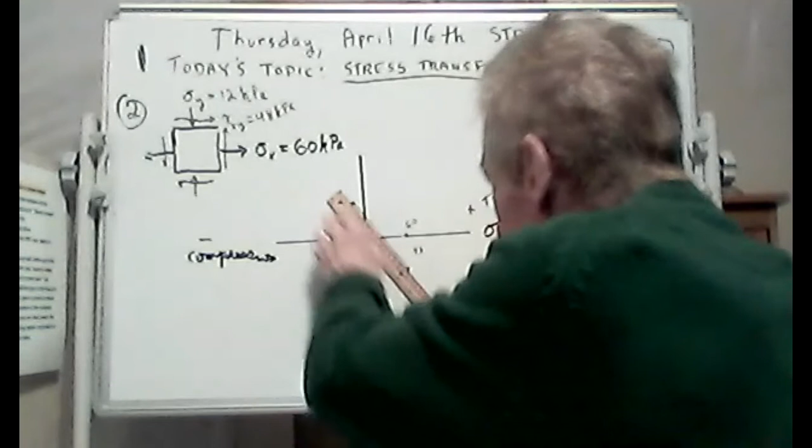Here goes. Diameter of Mohr circle coming up. Here it is. Okay, there it is. Now we need to find this center.

Now let me think about this. From 60 to minus 12, that's 72. Half of 72 is 36, right? Oh right. So that means that this here is 36, and from there to there is 36. And this is 48. I need to know this radius of the Mohr circle.

Let me do that. If you go 36 squared plus 48 squared, square root, help me do that. Let's see what that is. We're going to get the radius of our Mohr circle. It's 60, it's a 345. Boy, it's 60, good going. It comes out to be 60.

Okay, now we're going to draw our Mohr circle. Here goes. Well, again, I think what I'm going to do, if this here is 60, that's 6 centimeters. I think I'm going to make some marks at 6 centimeters. So there would be one there. And 6 centimeters puts you right there.

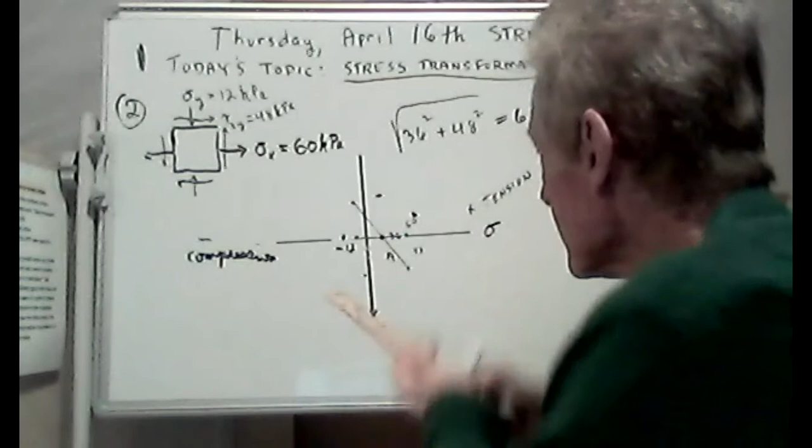And 6 centimeters puts you over here. A little bit messy, but that's okay. And here's 6 centimeters kind of down here. I already got a point there. Okay, I think I'm ready to draw my circle. Here goes. We are drawing Mohr's circle now.

Professor, where did you get the 36 and the 48? Oh, thank you for asking. Do you remember we had 60 from here? Look, from here to here is 6 centimeters, and that's 60.

And see that 12? It's minus 12 because it's compression. From here to here, it's minus 12. Here, let me draw it for you. You got a little minus 12 here, and you got a plus 60 here. And you know what that makes? That makes 72, doesn't it? From here to here is 72.

Yes, Professor, I get that. And see, halfway between there, oh, that's the 36? Yeah, that's the 36. Thank you so much for asking. See, that's 36 and 36. So that's the radius of the X direction? Yeah, it's really not a radius, it's the middle. Or radius, the radius turns out to be 60.

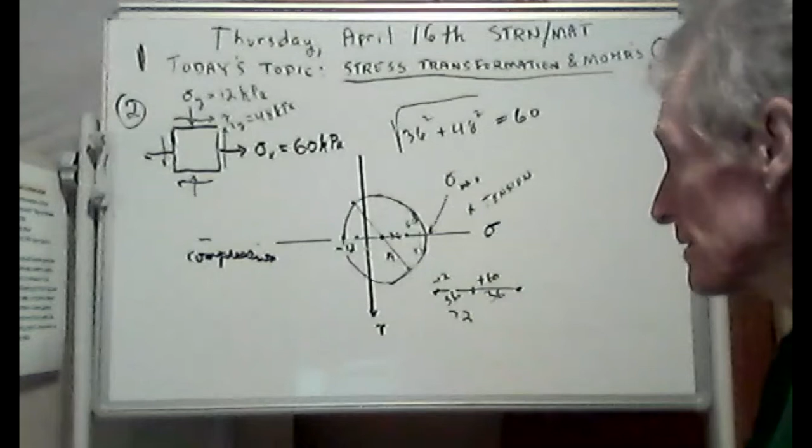Okay, I can tell you what the maximum normal stress is, I think, but I need to find out where this point is. This was minus 12 here, and that's a plus 60 here, and there's 72.

No, the 60 is here. Shouldn't it just be 60 minus the 36? So it's 24. Yes, good thinking. This point right here is 24. And if you subtract 36 from 24, do you get minus 12? And you know, you do. Good going.

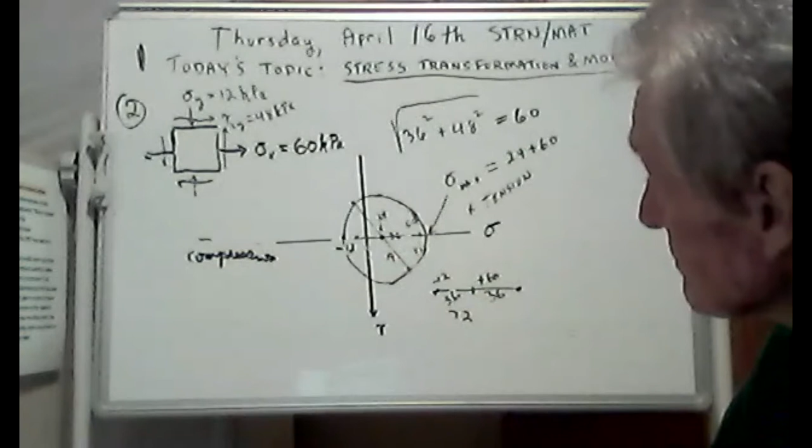Okay, so I can tell you what this is. It's 24 plus, should be 60. Because didn't we say the radius is 60? Yeah, I think that's right. It should be 84 KSI - that should be your maximum. We ought to check it though.

And that's the maximum normal stress. Now but wait a minute, that's the maximum tensile normal stress. There's also a maximum compressive normal stress right here. See this place right here? We've got to find what that is.

Well, wouldn't it be minus 12? Isn't that what we said? Negative 36? No, it's 24. It's 24 minus 60. What's 24 minus 60? Negative 36, that's what you're trying to tell me. It's negative 36. We think the maximum compressive stress is negative 36 KSI.

Now, if you want the maximum shear stress, that's right here. That's 60 KSI. So we've got all of our maximum stresses.

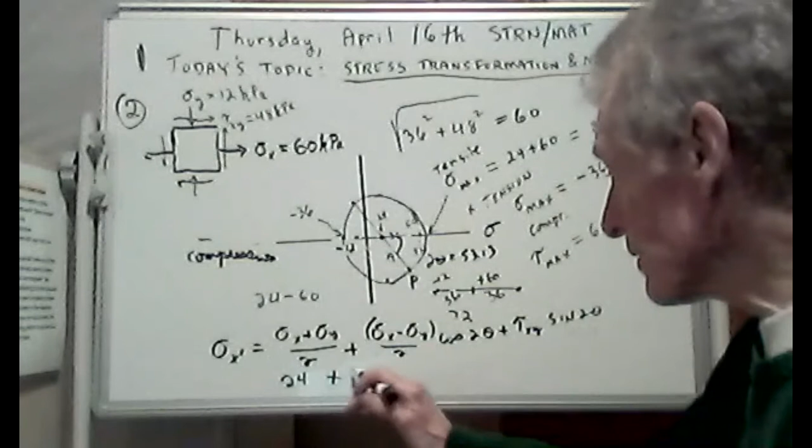Cosine of 2 theta. We think that this 2 theta, if you want to find this maximum stress, is the most important thing on this diagram. It's the maximum normal stress. That's important too - sometimes compressive stress is important.

But this is going to be 5313 plus 48 times the sine of 53.13. Now, if we're very lucky, we're going to get this answer of 84 that we already figured out. Plug this stuff into your calculator and let's see what we get. Here we go.

24 plus 36, 53.13 cosine plus 48, 53.13 sine. By Jove, I'm getting 84 KSI. That's what we figured out - that's the maximum normal stress. It's 84 KSI.

You could use the stress transformation equations to find this negative 36 KSI and to find this 60 KSI shear stress.

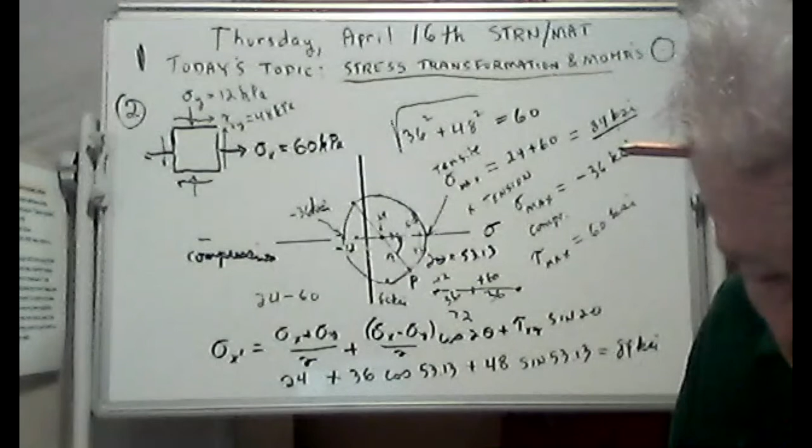How visible it was - this is Ross. Okay Ross, how visible my homework was. I think I was able to see your homework, I remember looking at it, and I think I was able to see it. Okay, I think it was okay. All right, cool deal, cool deal. Anybody else?